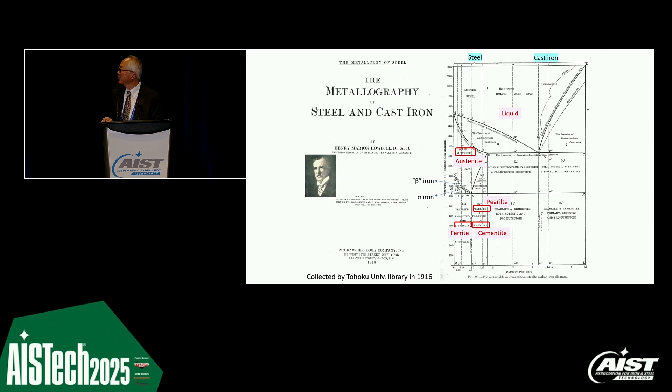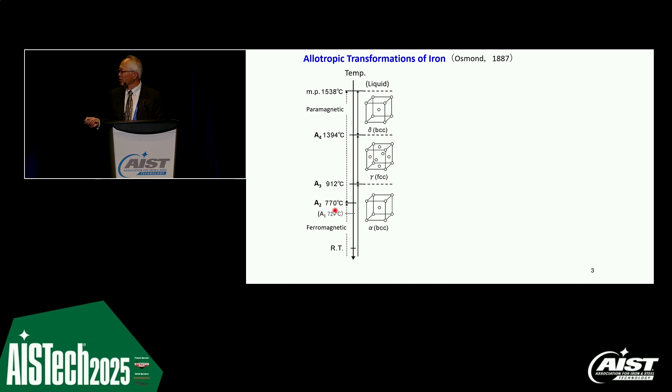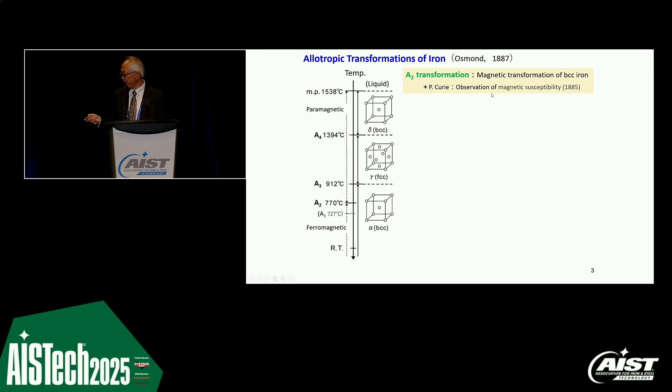Of course, you know that there is phase transformation in the solid state of iron after cooling down from the melting temperature: BCC, FCC, and again BCC. And there is one transition temperature, the so-called A2 temperature, which is the magnetic transition for pure iron. There was a debate about the so-called beta iron. In the previous phase diagram, there was a region for beta iron and alpha iron for BCC.

There was a long discussion between the allotropists and the carbonists, and Professor Howe belonged to the carbonists. Our first director, Professor Honda, contributed a bit to the resolution of this phase transformation issue. He performed thermal measurements and found a continuous change in the differential curve, meaning it was not really first order, but a kind of second order phase transformation. Later, Westgren clearly showed by X-ray diffraction that there was no crystal structure change.

After that, as I explained in the previous figure, the phase diagram was set by Roberts-Austen and Roozebaum. Then Professor Howe's work on the nomenclature of the phase diagram was settled.

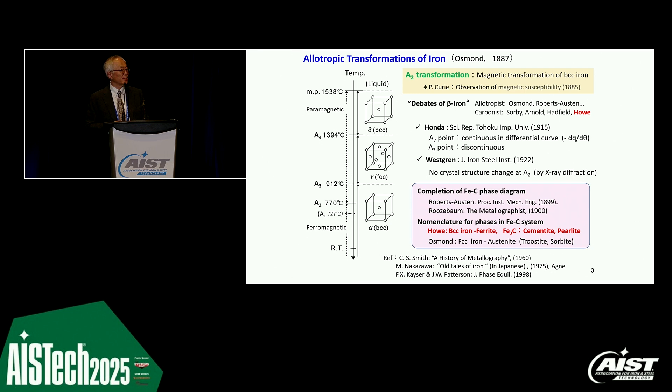Our institute was also established in 1916, so now it's over 100 years. We have a mission to perform fundamental and applied research on materials, and we have about 100 professors in our institute. Related to steel research, there is Professor Honda, also Professor Nishiyama with Martensite in Japan, and the famous Professor Kaya, who found the magnetic anisotropy of pure iron, which is fundamental to the current technology of grain-oriented electric steels.

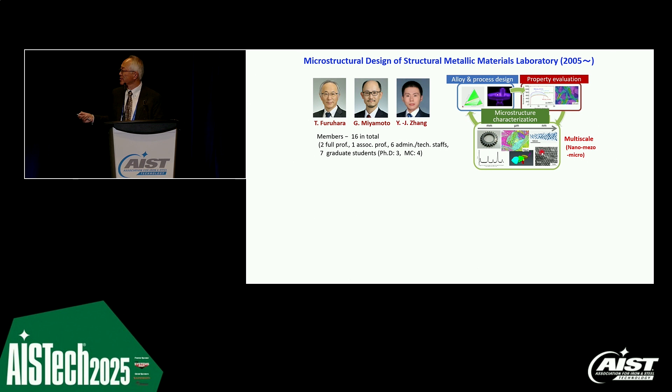My research group started in 2005. We work on this kind of cycle: processing, alloy development, processing design, and microstructure characterization. I work on fundamental issues related to phase transformation, precipitation, deformation, and recrystallization. As a result, we also work on property control using thermomechanical processing, which is the main topic of today's lecture.

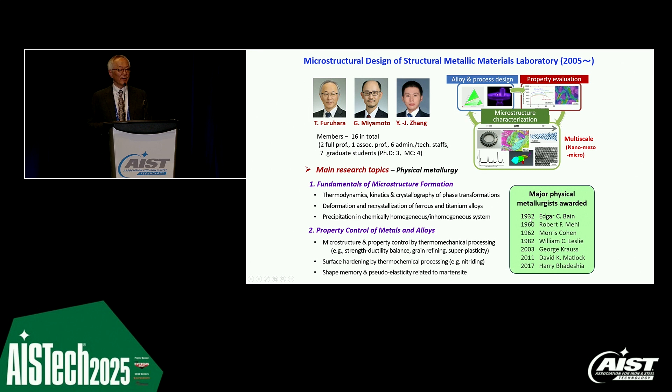We also work on thermochemical processing, so-called nitriding. As a physical metallurgist, I really feel honored to see the previous physical metallurgists on that list. I really feel honored to receive this award. It's very special for me. Now for the main topics.

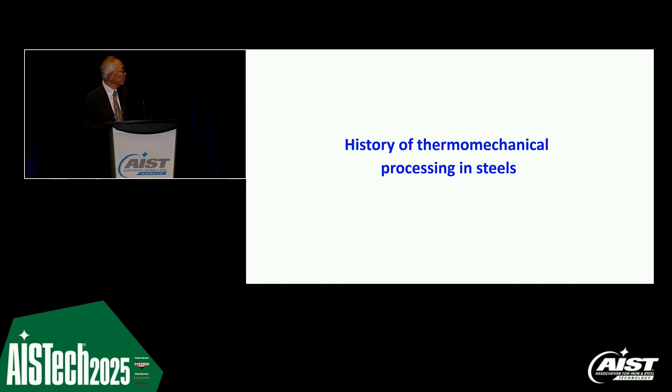First, I'd like to mention the history of thermomechanical processing of steel. Of course, we know different kinds of steel products: sheet, thick plate, pipe, bar, gear, and so on. To form these kinds of products, we use thermomechanical processing. Here, I show you different kinds of phase transformation products: ferrite, bainite, and martensite, plotted on the phase diagram.

Here's the phase diagram of iron carbon, temperature versus carbon content. When you look from high temperature going down to low temperature, we have an increase in tensile strength like this. So it's very important to control the transformation temperature to produce high strength steels.

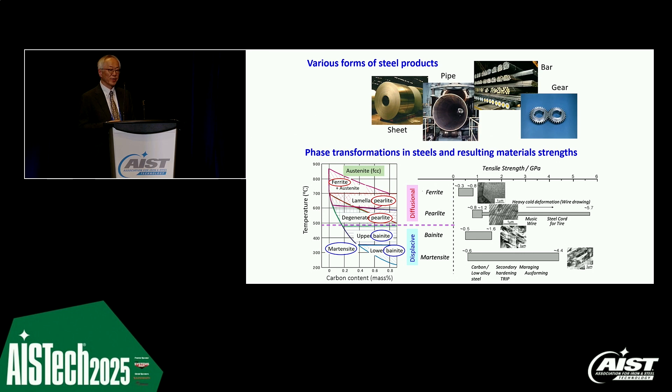This is the classification of thermomechanical processing. Of course, we apply deformation, and when we deform the materials, we separate the processing into before transformation, during transformation, and after transformation. The target of the phase transformation can be diffusional transformations like ferrite and pearlite, or martensitic transformations.

The famous one, of course, is controlled rolling. We now know TMCP combined with accelerated cooling. For applying martensite before transformation, we call that direct quenching or ausforming. And during transformations...

It's not really coming out. Okay, here you go. Isoforming, or that's the...

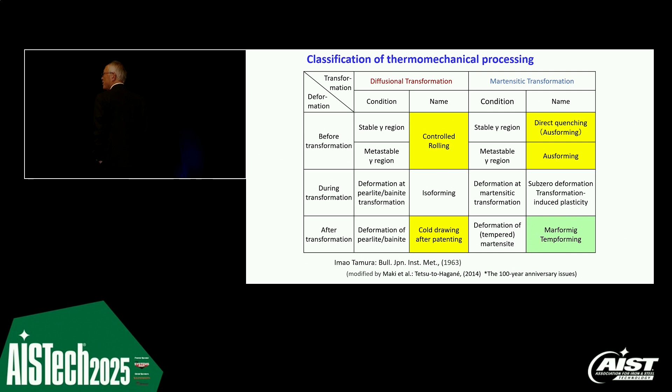Sub-zero deformation or TRIP. After transformations, we have what's called drawing, like after patenting for high carbon steel. Also now there's marforming or temp forming, which is applied for martensite after deformation, after transformations.

So this is the change in the typical thermomechanical processing of steels over the past 50 years. We really started from displacive transfer martensite and applying it for high alloy steel, for ausforming and TRIP, invented by Professor Zackay in Berkeley.

Then after that, the main steel product goes to thick plate. We apply diffusion transformations, ferrite and pearlite, by applying control rolling and accelerated cooling in the 70s and 80s.

Then again we go back in the 90s, and in 2000 we go to direct quenching and also ausforming and TRIP.

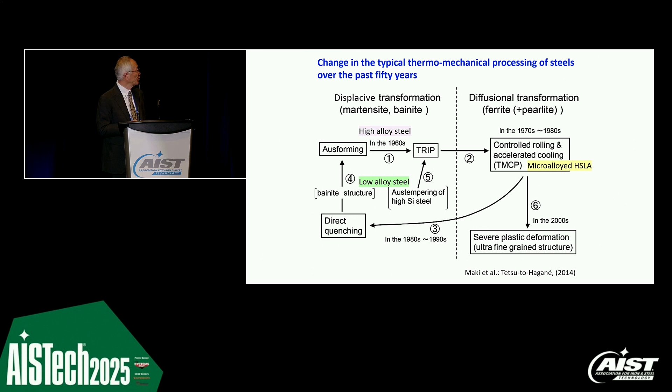Strength definitely changes, of course. At first we have very high strength, over 2 gigapascals. Then we go to lower strength product for diffusion transformation. Then we again go back to higher strength now.

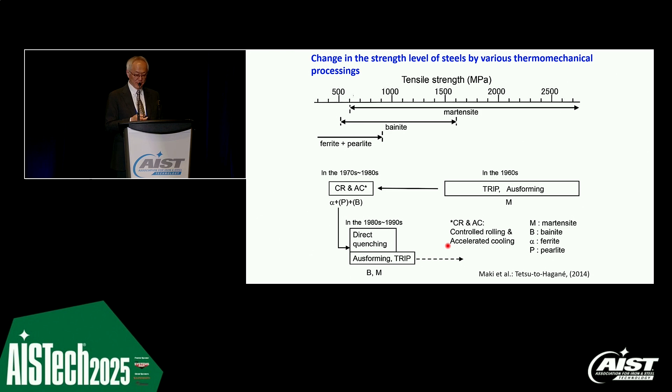This is the main research and development of low alloy steels in the 70s to 80s in Japan. For thick plate, of course, TMCP is explored by replacing the microstructure property from ferrite and pearlite to bainite. For the topic of sheet steels...

Between the 60s and 80s, very soft iron was very important. So IF (interstitial free) steel was developed for body design.

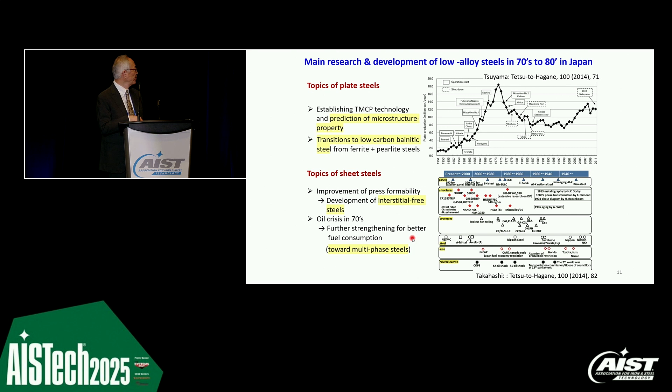And then after the oil crisis in the 70s, and also as the importance of crash worthiness was focused on, we explored higher strengths, toward the dual phase series in the 90s and 2000s.

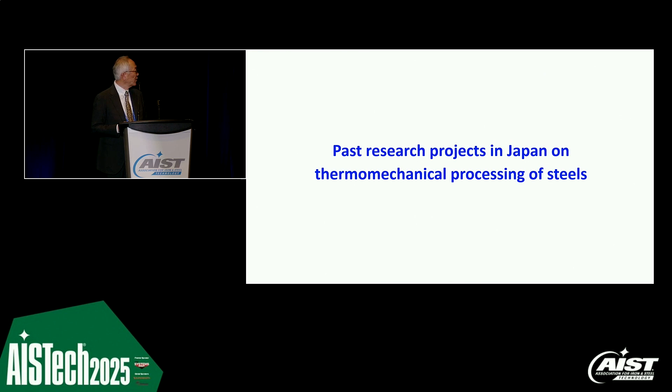So I'd like to introduce the past national research projects in Japan. You may not be really familiar with that, over let's say 20 years or so. Main topics for steel...

Project for the physical metallurgy-based one. In the late 90s, early 2000s, we had the Ultra Steel project and also the Super Metal project. This one is for academia and this one is for industry. Both of them focus on ultrafine-grained steels for superior strength and toughness.

After this project, we had another project, the Nano Metal project, in the early 2000s. This used nano-size precipitation for high-strength steels, mainly transition metal carbides, trying to achieve a bit more strength.

And later, R&D fundamentals for forging and also welding. For forging materials, medium carbon steel, they use alloy carbide, mainly vanadium.

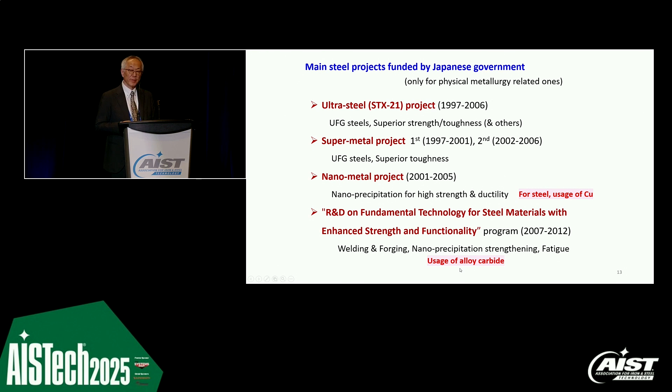For ultrafine grain, what is the importance of ultrafine grain of ferritic steels? Of course we know strengthening can be obtained by the Hall-Petch relationship. Also toughening in terms of the ductile-brittle transition temperature -- we can lower this transition temperature as a function of grain size.

At the beginning of this national project in the late 90s, the normal transformation ferritic grain size was about 10 microns. Applying TMCP, we can go down to 5 microns. Now...

But if you try for grain size less than 1 micron, we can actually double the strength and also obtain a really low transition temperature. So that was the main target.

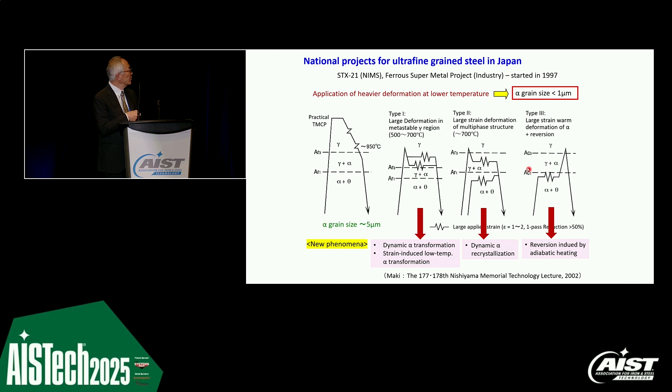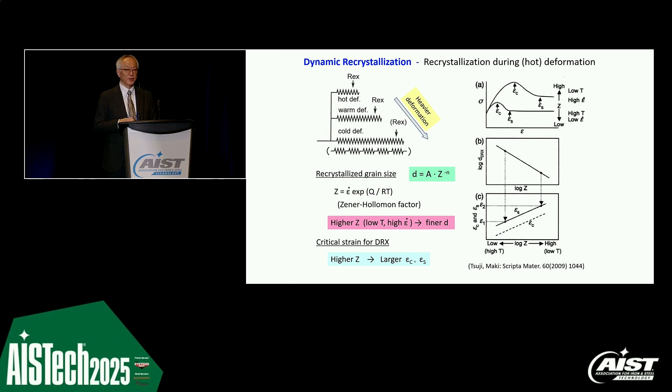So although we can obtain ultrafine grain materials, we need to apply heavier deformation. That's why severe plastic deformation is very important now.

There's also discussion about the recrystallization phenomena moving from discontinuous to continuous. By applying further strain, going up to the severe plastic deformation level, we can change from subgrain structure to ultrafine grain structure by increasing grain misorientations through absorbing dislocations at the grain boundary.

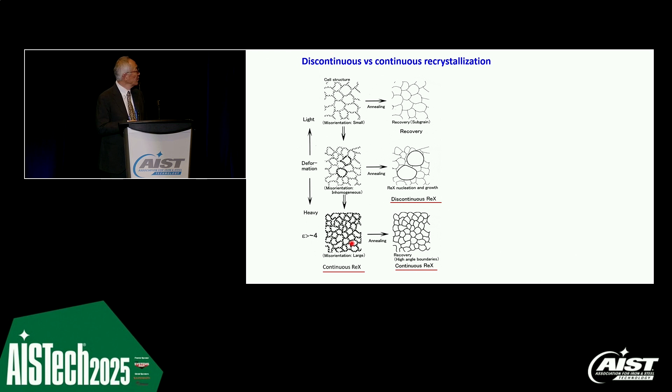Dynamic recrystallization, as given in textbooks, produces subgrains for the continuous type, where the subgrain boundary changes to a high angle grain boundary.

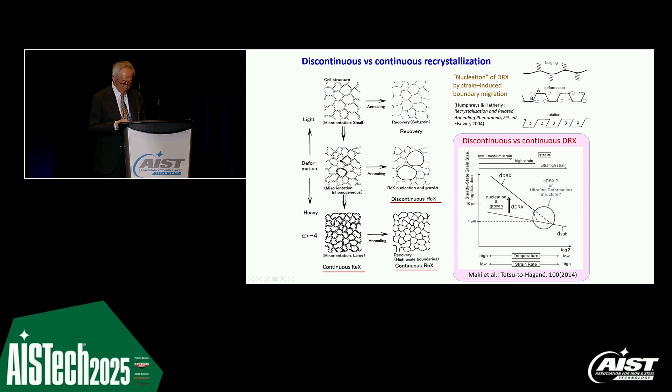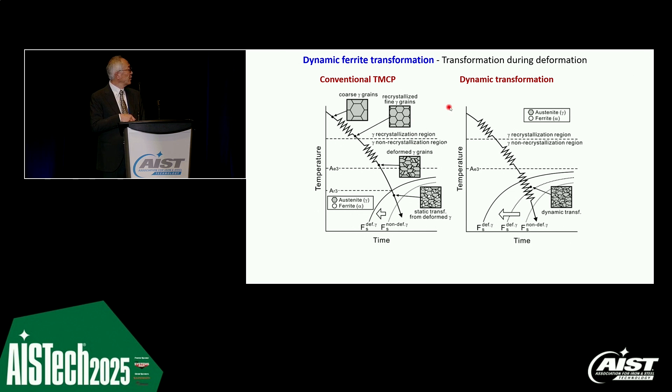However, when we look at dynamic transformations, we have further deformation below the transformation temperature - deformation and phase transformation occurring during deformation. As a result, because of the stress-strain effect, we have a change in phase stability.

This depends on the compression or processing condition. We have very complex phenomena in terms of dynamic transformations, but anyway, we have a new phenomena - transformation during plastic deformation.

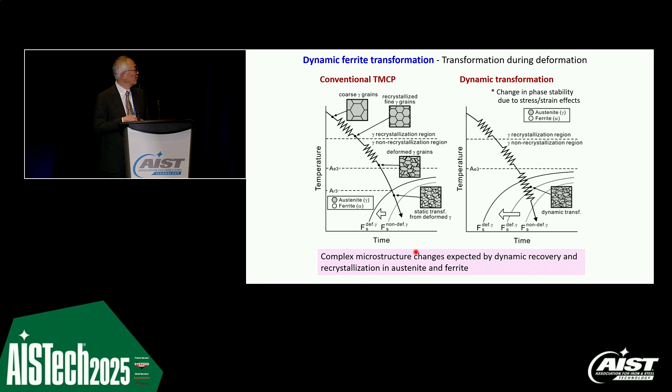As I mentioned in the national project, severe plastic deformation becomes more important. This includes shape invariant plastic processing methods like ECAP, high pressure torsion, multi-directional forging, or accumulated roll bonding. All of these plastic deformation processing methods can apply very severe, high strain - epsilon over 4 - in terms of severe plastic deformation.

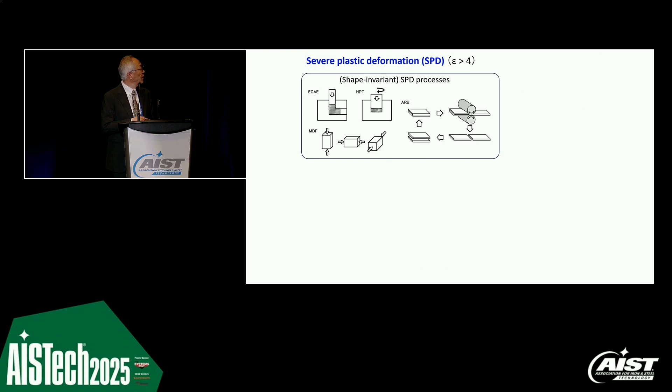By having such severe plastic deformation, we have very interesting phenomena. We can increase pure iron to 4 times higher in tensile strength and yield strength. Usually we expect work hardening to give lower ductility. However, by having high density of mobile dislocations, we actually have better ductility as-deformed. However, if we anneal that, we lose the ductility.

The other case is caliber rolling, also applying severe plastic deformation. In this case we get ultrafine grain fibers and texture. Going down to low testing temperature, we actually see an increase in toughness.

This is called delamination toughening - along the longitudinal direction, we have preferred fracture. However, it is difficult for such cracks to penetrate over the thickness. That's why we have this kind of very peculiar phenomena in toughening.

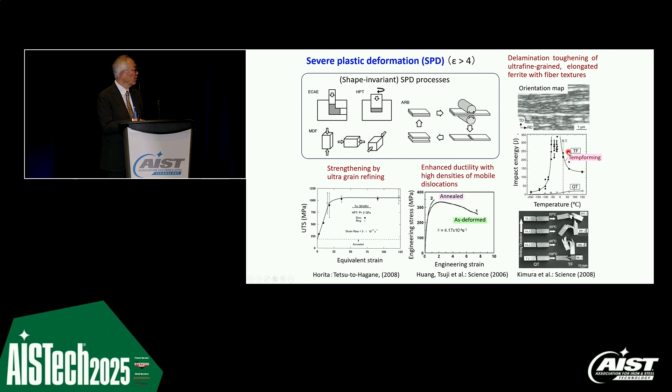I'd like to also emphasize controlled heating after thermomechanical processing for strengthening of steels.

So for the ultrafine grain case, in the 60s we know the rapid heating and quenching technique proposed by Grange produced ultrafine grain austenite. As a result, by quenching we can get ultrafine-grained martensite steel. This is one case to get austenite grain size less than 10 microns.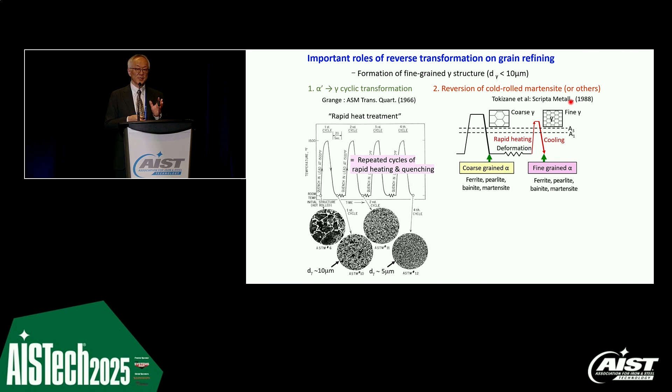The other case, in the 80s in Japan, Professor Tokizane applied cold rolling and reversion of the martensite. By doing that, we can reduce the austenite grain size down to 5 microns by having particle pinning, maybe 2 microns or so. We also applied that in this case for model steel.

But this is for low alloy steel, where reversion takes place quickly. For high alloy steel, like 9 nickel steel, with important cryogenic thick plate applications, it's different.

Here's the phase diagram with austenite and ferrite, and this is the two-phase field. This is the cooling down, and we have the phase driving force for forward transformation. There is also the case of reverse transformation, and these are the characteristic lines for T0.

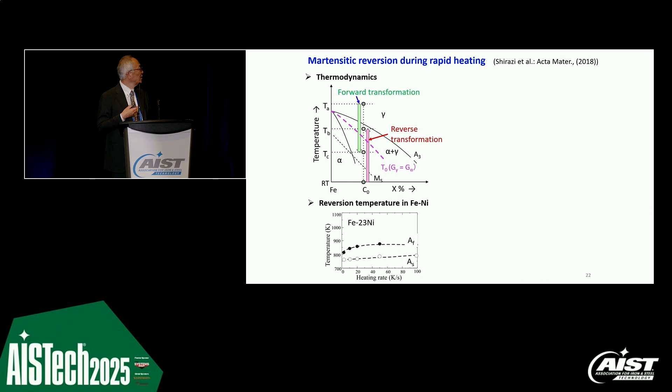Austenite and ferrite have the same energy at T0. Below that, for forward transformation, we have the driving force for martensite transformation. Above that, we can also have martensitic reversion, although there is more diffusion occurring at high temperature. So when we have such martensitic reversion, we can get good grain refining by reversion, because of the so-called austenite memory phenomenon.

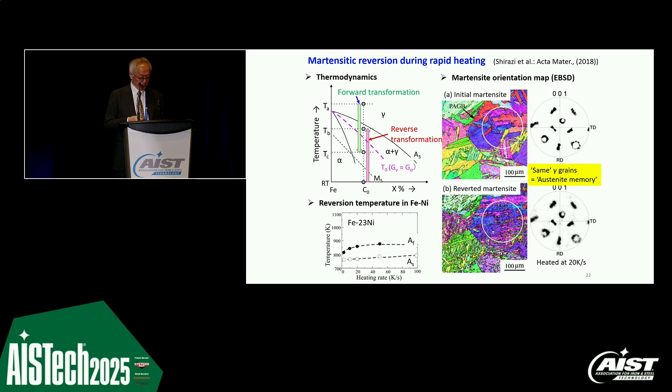This is the initial martensite structure, and this is after reversion and quenching. We have the same austenite grain size and almost the same, only slightly refined martensite structure. Anyway, this austenite memory effect is prohibiting grain refining during reversion for high alloy steel, so we have to be careful about that.

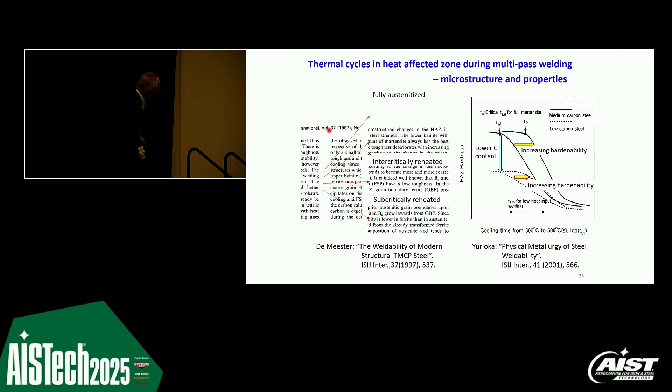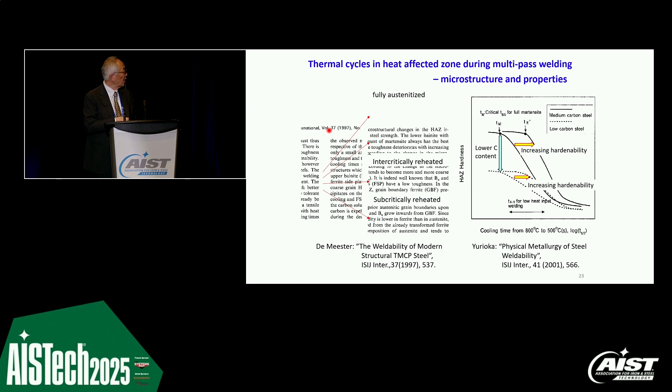Also, the thermal cycle in welding is very important. We have different kinds of thermal cycles—some figures are missing, sorry about that—but anyway, welding is difficult. We have these different kinds of thermal cycles depending on the position along the thickness.

Rapid heating can also be important for tempering of martensite. Tempering of martensite involves precipitation of the supersaturated carbon as a precipitate, and also recovery of the high dislocation density in martensite. But when we apply rapid heating tempering, we can get finer dispersion of cementite and retain a slightly higher dislocation density. As a result, we get higher strength and better toughness with this kind of heat treatment.

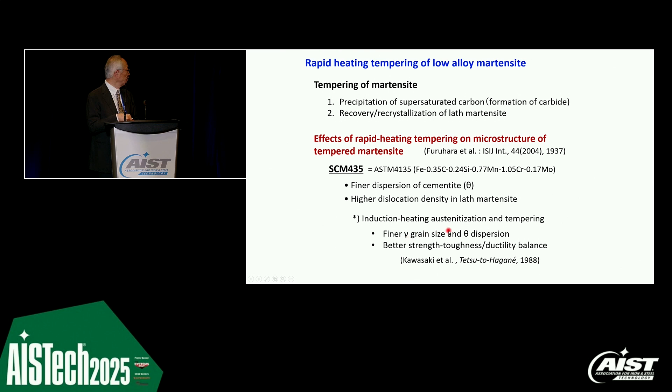You can use induction heating in-line—this was already found in the 80s by Kawasaki—and by combining both induction reversion and induction tempering, we can get finer grain size and better strength-toughness balance. So this kind of controlled rapid heating gives much better properties.

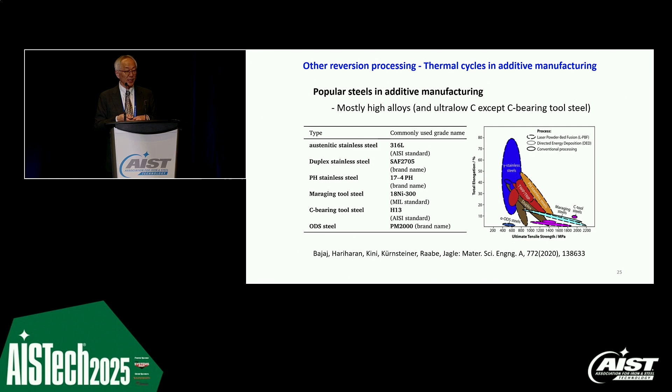Now of course, all over the world additive manufacturing is popular, and for steels, relatively high alloy or high carbon steels, there's a lot of work done applying such thermal cycles in additive manufacturing. There may be several products, and perhaps maraging steel and high carbon steel, we can have phase transformation take place.

So during the thermal cycle in additive manufacturing, we may achieve grain refinement by controlling the reversion treatment.

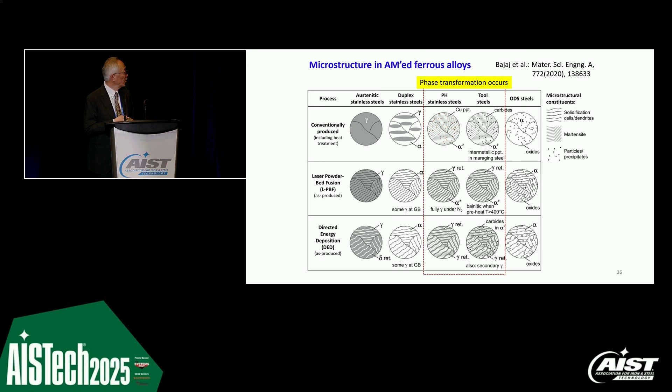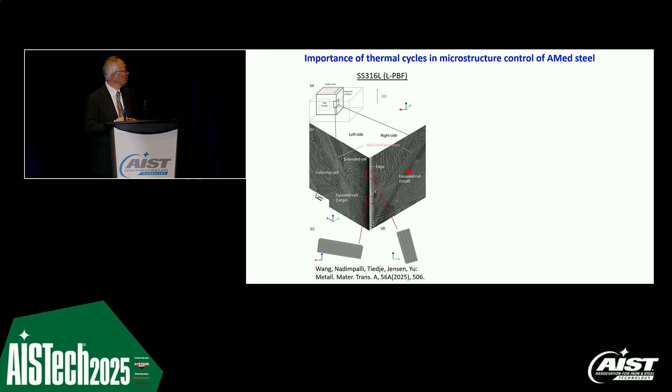This is one example for austenitic stainless steel, showing a very nicely aligned structure during laser powder bed fusion. And of course we now know there are different characteristic dislocation structures as well as elemental segregation occurring during these thermal cycles.

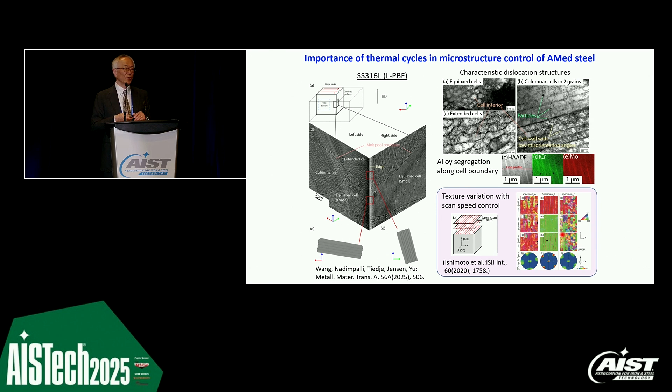I'd like to introduce one nice piece of work done by Professor Nakano at Osaka University in Japan. They are controlling the heating temperature, and they can actually change the texture by applying such nice reversion heating control. So it's obvious that controlled heating is very important for additive manufactured steel too.

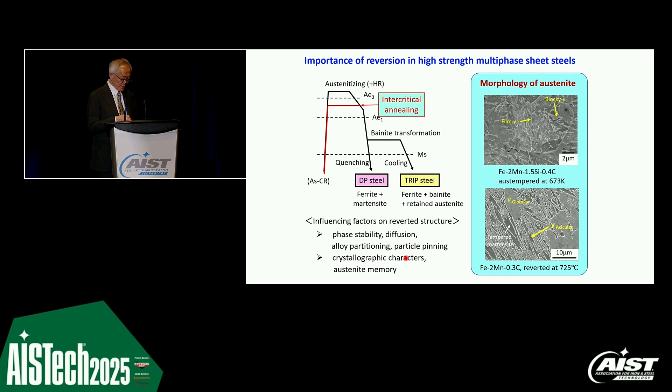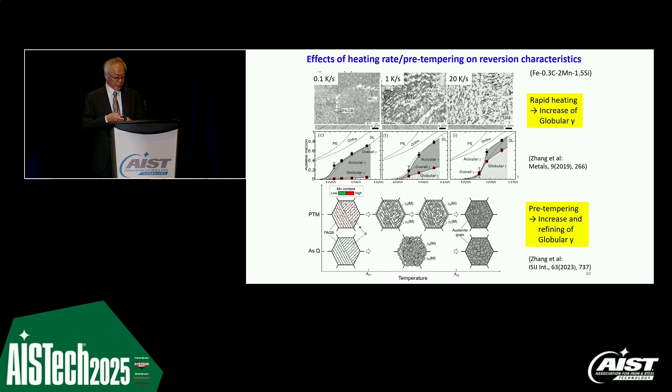Recently, let's say in the last 10 years or so, during reversion or intercritical annealing, or after that high temperature reversion, particularly for medium manganese steel, researchers have been focusing on using manganese heterogeneity for a better strength and ductility balance.

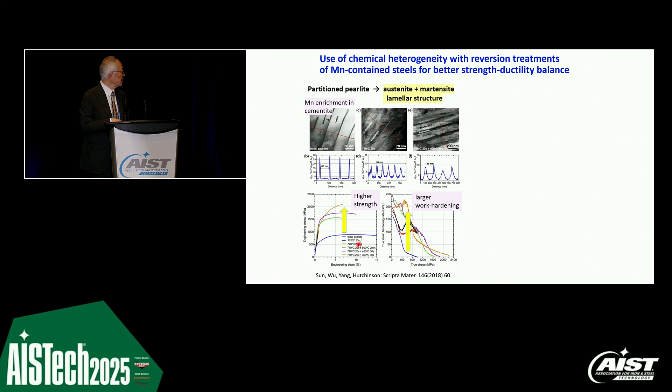This is an example by the Monash people. They started from partitioned pearlite, with medium manganese steel, I think. We have manganese enrichment in the cementite. After a complete reversion, a short time, we get austenite and also martensite lamellar structure. By having such a microstructure, they succeeded in obtaining higher strength while losing not much ductility, and also large work hardening.

There are several other examples: in Germany for the TRIP case, in Japan a core-and-shell type retained austenite, and one from China where so-called flash annealing is used to control the manganese heterogeneity in the reverted austenite. So this is the area academia is focusing on now.

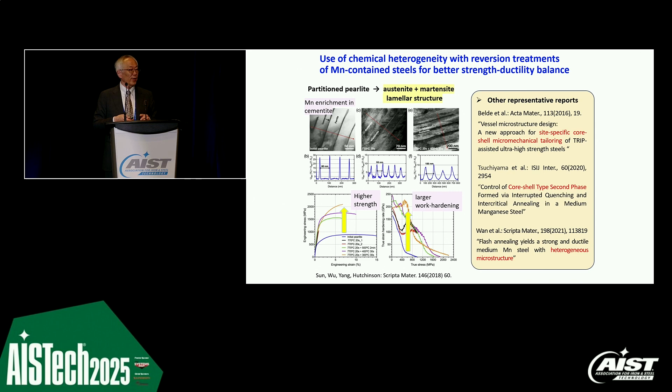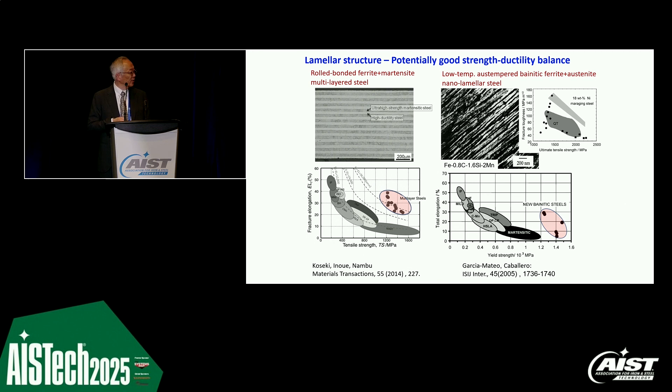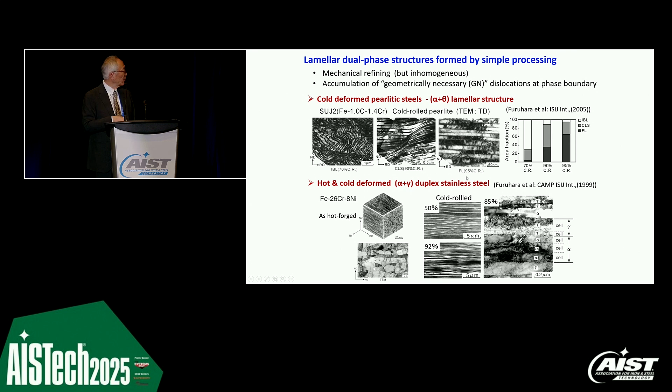Of course, we know cold deformed pearlite can produce such microstructure, and this is our case. We apply heavy cold rolling and we can obtain cementite lamellae elongated parallel to the rolling plane. We can get a similar structure starting from duplex stainless steel after hot forging and cold rolling.

For this lamellar cold rolled pearlite case, recently a research group in Japan found that hydrogen can be trapped at the cementite-ferrite lamella interface, leading to better suppression of hydrogen embrittlement. So this may be a very interesting research area for hydrogen embrittlement suppression.

The Elements Strategy Initiative research initiative was set up at Kyoto University and explored for 10 years, for better toughness, strength and ductility balance. The main output is a fundamental one: a new plaston-enhanced plasticity concept. By having ultrafine-grained materials in magnesium, copper, iron, or aluminum, we can change the plastic deformation mode from slip to twin or martensite. This way we can control the strength and ductility balance. The other important part is advanced characterization technique, which was really developed during this field.

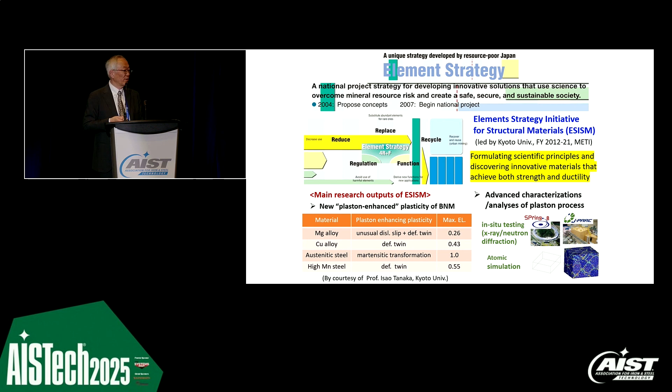Another one is supported by the Ministry of Economy, the so-called ISMA project, for structural materials. Of course, we have different kinds of strengths needed for automobile applications, so also aluminum or iron has been bonded - joining of structural materials is very important. There are first 5 years and second 5 years, two terms.

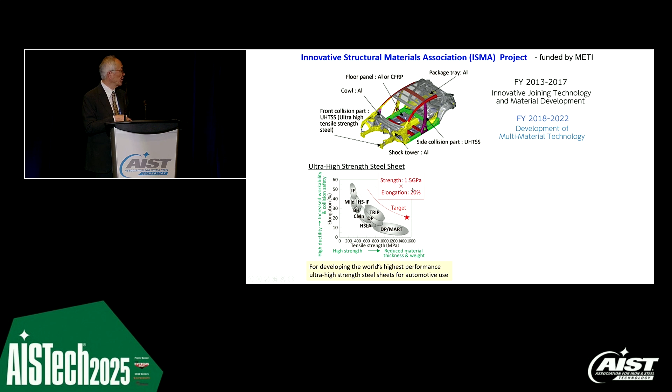For steel, in the first 5 years, there was a target of 1.5 gigapascal and 20% ductility. After 5 years, the target was achieved. So after the later 5 years, they are focusing more on fundamental issues and joining.

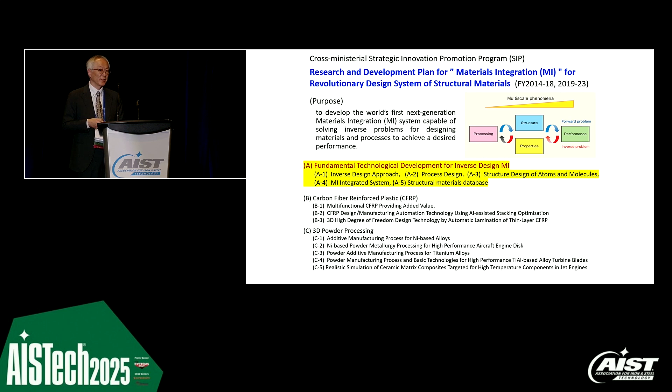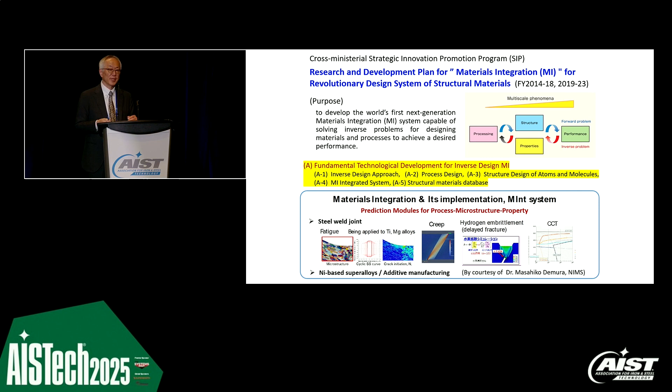The other thing is the cabinet office supported materials integration, similar to ICME in the US, particularly for fundamental technology development for inverse design. Materials integration and its implementation, the so-called MInt system, is set up at NIMS in Japan. That is a prediction module for process, microstructure, and properties. Applications are for fatigue, joining, creep, and also hydrogen embrittlement. So that kind of work has been done recently in Japan too.

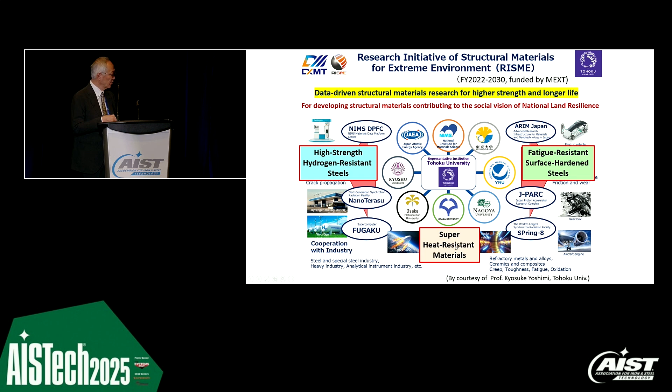Now a new project started 3 years ago. Tohoku University leads this project on extreme environments for structural materials - we call it RISME. That's data-driven structural materials for a better life. There are 3 subjects: high-strength hydrogen resistant steels, better fatigue resistance for surface hardened steels, and the other is super heat resistant materials. We have much institutional project work on that.

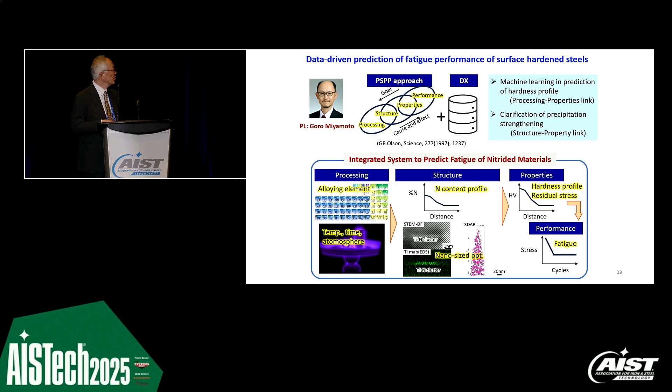Our group is working on data-driven prediction of fatigue performance of surface hardened steels, led by my colleague Professor Miyamoto. We're trying to develop an integrated system for prediction of fatigue and also the hardness profile from the processing, alloying design, and microstructure, and also the properties. For that, we're using machine learning and also trying to develop physics-based models. That's the kind of thing we're working on in Japan recently for a national research project.

At the end, I'd like to explain a bit about ISIJ, the Iron and Steel Institute of Japan. Of course, AIST is a great partner on that. In this institute we have over 8,000 members, and of course foreign members, over 100, including 8 currently from the US.

We're trying to connect academia and industry through activities in this institute. The current leaders: Professor Dr. Fujita switched from Professor Fukuda, Vice President of Nippon Steel - he's the president now. The vice president is Professor Nogami from Tohoku University, and another vice president is Dr. Fukushima from JFE Steel. I was the past ISIJ president.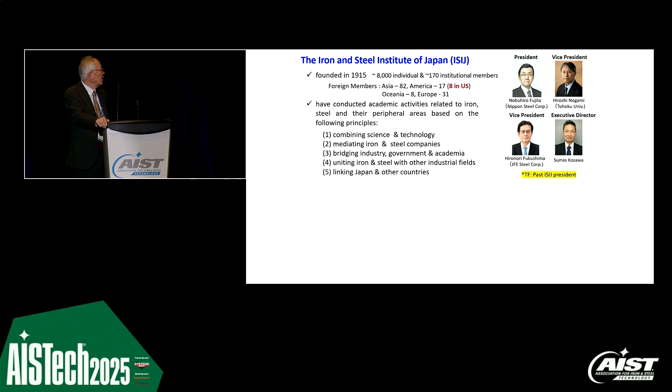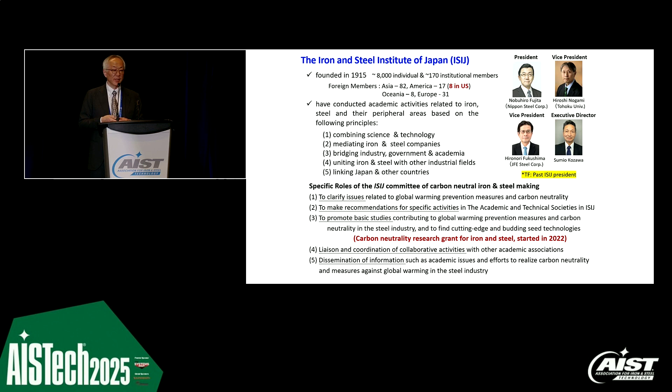For carbon neutrality, in this institute we try to clarify the issues, set up activities, and promote basic studies and so on. Three years ago we started the carbon neutral funding project. We tried to support about 20 projects in academia, and we are still extending such funding in ISIJ.

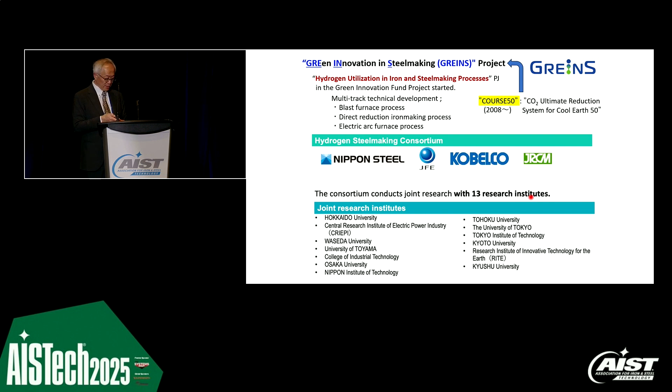Also, a national project again for carbon neutrality is the GREINS project, for hydrogen direct reduction. The steel industry has been working on this for a long time - it's an industry consortium combined with multiple institutes from academia, covering blast furnace applications and electric furnace applications. Starting with direct reduction cases, we also have mini mill type projects. This kind of project is going on in the US and all over the world.

Finally, I'd like to make short remarks on the importance of material science research. I'm from academia, so scientific research is important for the development of science and technology, and also for a sustainable society in the future.

For building a safe and reliable society, we need better construction and many kinds of social infrastructure. Carbon neutrality is another target, and environmentally friendly material development is also important.

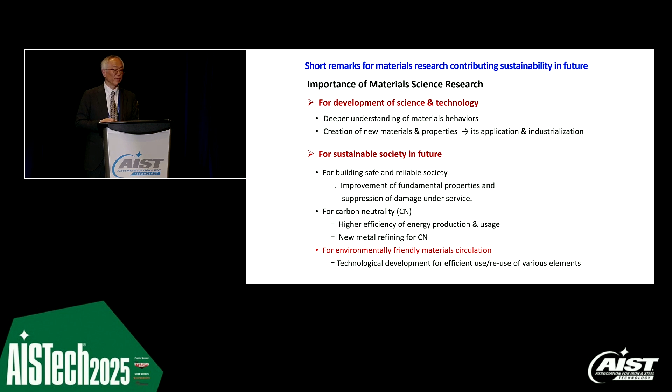Some of these materials have already exceeded the potential resources on Earth, so we need to think about environmentally friendly material development, not just focus on producing new materials.

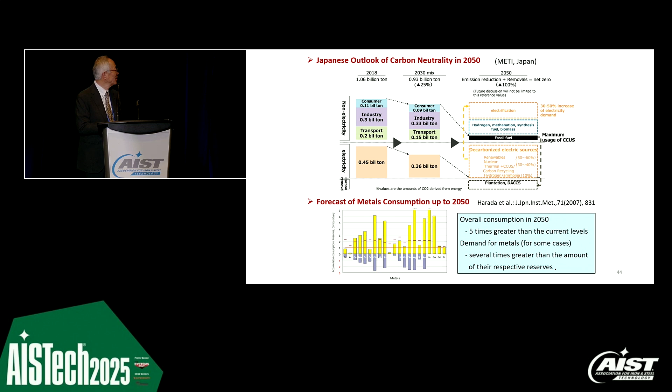Recycling is of course important. Steel is rather better studied in that regard. However, for non-ferrous alloys like aluminum and magnesium, it's difficult to extract impurity iron elements due to thermodynamics, so we need to work harder on that.

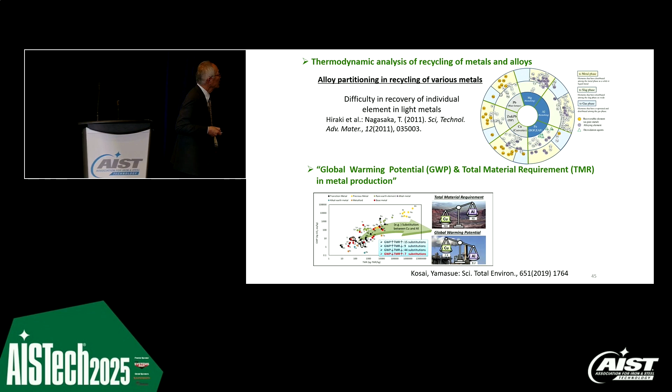We usually use global warming potential to discuss materials production from an industry base. However, there's another measure: total materials requirement. This is another new kind of standard.

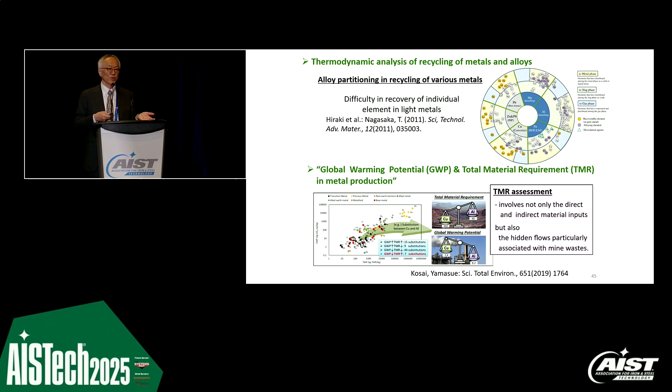We have to focus also on the measure for material waste. So recycling and the mining and use of such resources are different subjects we have to think about, both in terms of scientific technology and industrialization.

We need to work together on this difficult task, and I hope we can have good collaboration all over the world. Finally, I'd like to express deep gratitude to my advisors and mentors.

Two professors from Kyoto University, where I was a student and also worked for 15 years: Professor Imao Tamura, who really initiated academic study in thermomechanical processing in Japan, and Professor Maki, who is a superstar for microstructure control in steels in Japan.

Our group, including my fellow colleague Dr. Miyamoto, inherits the history of research on thermal processing in steels over 40 years in Kyoto. My research group worked on this for 20 years, so over 60 years of history we are carrying on this heritage.

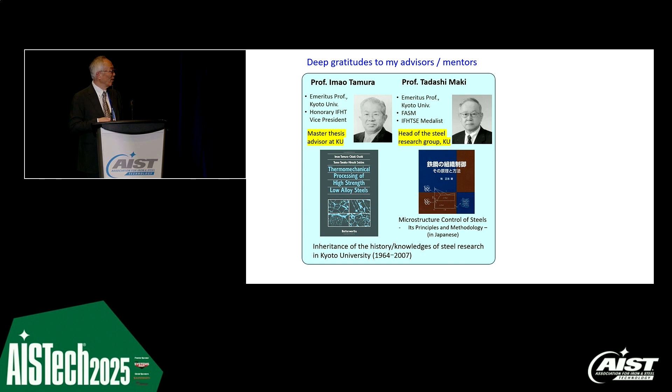One professor in the US, my thesis advisor Professor Hubert Aaronson at CMU, taught me deep fundamental knowledge of phase transformation, not just in steels but in other metallic materials.

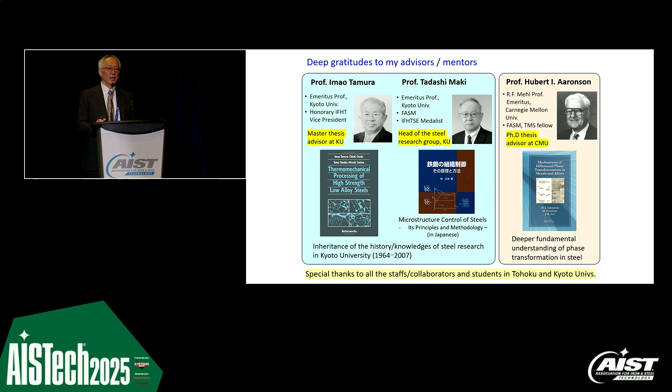Special thanks also to all the colleagues, collaborators, and students, and finally to my family. That's all I want to say. Thank you very much for your kind attention.

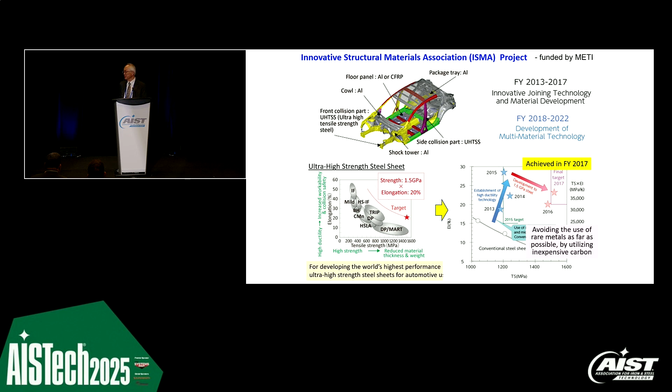Thank you again. I think part of the work and research is still going on after the ISMA project, and steel company personnel are working on such issues. For sheet steel, I think induction heating and online heat treatment is rather easy compared with thick plate steels, so that can be done to control and use such manganese heterogeneity in sheet steel applications.

Also for thick plate, that's for high nickel alloy, you can again use reversion-case morphology to dictate the nickel partitioning too. So that is a very important issue for both plate and sheet steel applications.

What is your prediction about the future of hydrogen and hydrogen embrittlement that you referenced? Because the world is trying to move in the hydrogen reduction direction. Can you comment, please?

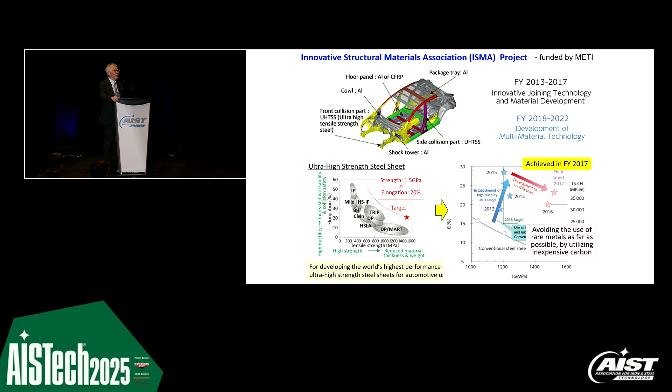Okay, so I'm not really a process metallurgy guy, but physical...